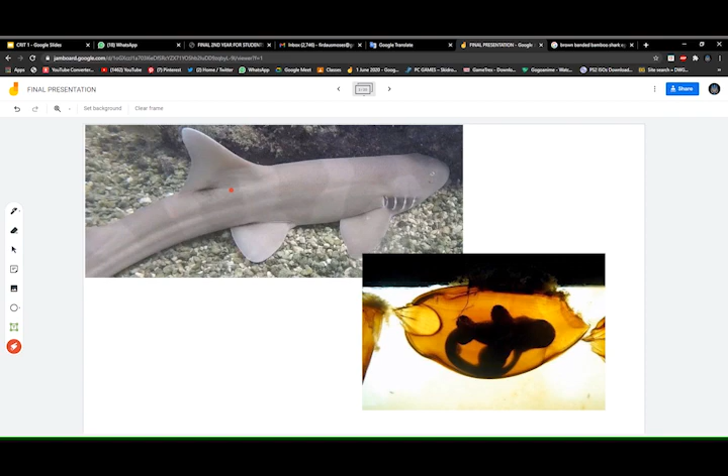Today I'm going to present my rehabilitation center for marine endangered species. The species I've been working on is the brown-banded bamboo shark, a shark species that lays eggs. It is a native shark that lives in Malaysia and is quite endangered here because of shark finning, and also because people love them, capture them and put them in aquariums.

So what is Warisan Samudera? For the introduction, sharks are actually apex predators. They live by maintaining the healthy balance of the marine ecosystem. Without sharks, the ocean will be a disaster and imbalanced. So Warisan Samudera is designed specifically to help continue the legacy of bamboo sharks in the sea, ensuring the marine ecosystem always stays in pristine condition.

Moving on to the site synthesis. For the site sensory, the wind direction comes from the north and northeast side. The view towards the beach is towards the northeast, and this is the sun path.

The first thing I synthesize is to maintain the vegetation, because the vegetation there is quite potential to provide shade to the building. The next one is that the site itself is close to the seawater, so why not use the seawater and channel it to the building for building usage. Also, there has lately been a lot of major flooding in Pahang, so we want to avoid that happening to the building. So I suggested that we elevate the building to avoid the flood from entering it.

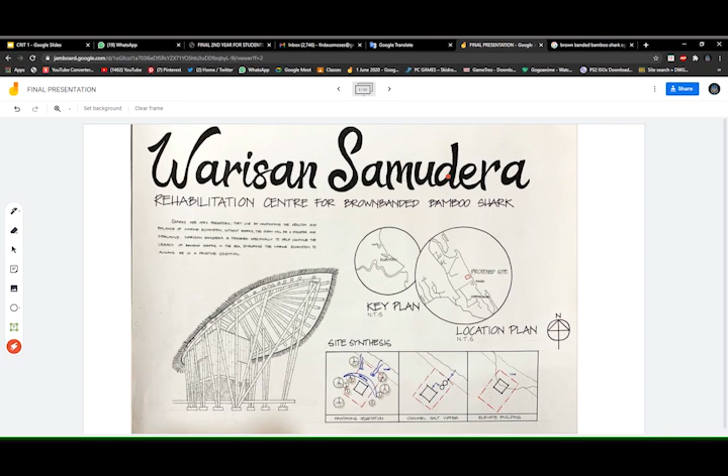Next is the site plan. I'll explain the circulation. The blue one is for public circulation. So they will enter and park here, or they can park there, or they can drop off people there, and then go straight out.

The next one is the green line, which represents the staff circulation. So they need to go here and here. This is the staff parking, and they need to go out once they finish their shift.

And the yellow line represents the technician or services circulation. So this is if you want to go to the dumpster or the cafe to load and unload stocks, the food stocks, or some exhibition stuff. And this is the part where they can load and unload equipment for the labs, the laboratory, and also the hatchery. And then they could go out here.

So moving on to the concept. The concept is inspired by the movement of the bamboo shark in the egg case itself, because for me the egg case symbolizes protection from predators. So what I mean by protection is that it aligns with the objective of the rehabilitation itself, which is to protect the sharks.

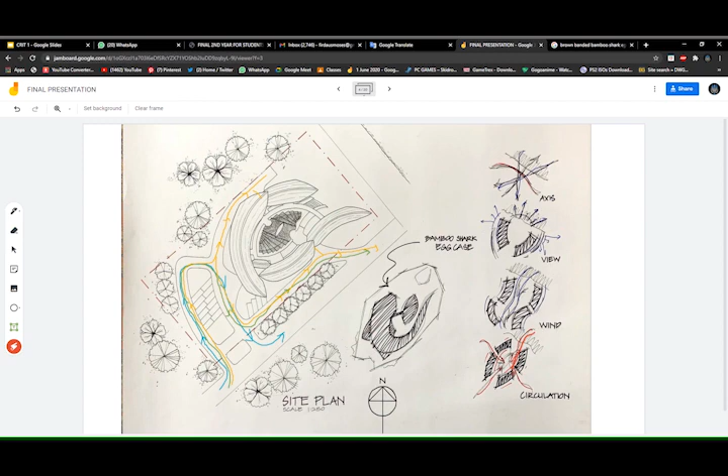Next is the floor plan. This is the waiting area for people before entering the lobby. Once they enter the lobby, they can rest here, or go buy tickets, or if they want to go to the toilet, they can access it from this door and go to the nearest toilets here.

Before proceeding to the briefing room, they need to pass the souvenir shop first. This is a bonus for the staff itself, because it attracts visitors to buy things at the souvenir shop. The next one is the briefing room, which will brief about the sharks, about the bamboo shark, and raise awareness about sharks. This is the technical room for the briefing room.

Moving on to the exhibition, this is the place where they are educated and made aware about the bamboo sharks. Once they finish with the exhibition, they can go straight to the hatchery, or if they want to rest, they can go to the cafeteria for food and drinks. This is the kitchen, this is the storage for the kitchen, and this is the loading and unloading area for the cafe and for the exhibition.

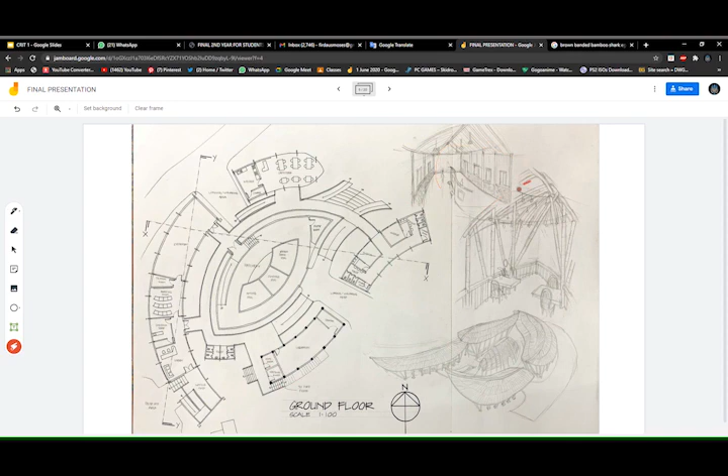This is the storage. Okay, so moving on to the first floor. This is the exhibition, and this is the cafeteria. This is the perspective from the exterior.

So this is the first floor. Once you go up, you can go straight to the storage. This is storage for office or library use. The staff toilet. To the left, we have the library.

The library can also act, besides study, as a meeting room, because the office is not actually that big to make a meeting there. So this is the staff table, the staff room. This is the admin, the office, and this is the pantry for them to have some rest there.

Okay, next, moving on to the design development. The first one is the design itself takes the basic shape of the site shape, which is rectangular, and it is oriented facing towards the view.

The next one is the shape is then divided into half to separate the public and private space. We shifted the public closer to the parking, so that users can access easily into the building, and also the private space is forwarded towards the sea for more privacy.

So next, an opening is created between the spaces, allowing the wind to enter the building. The design starts to take its shape by creating a semi-panoramic view to capture the view. So this is the semi-panoramic view to capture the view.

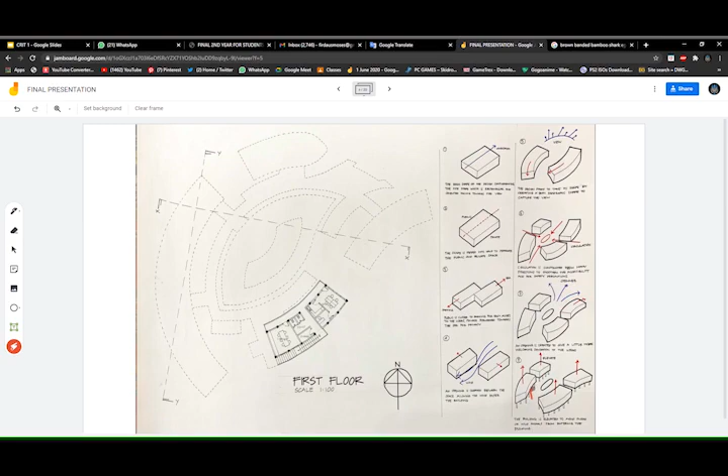And also the last one is the building is elevated to avoid flood or wild animals from entering the building. So this is the elevations: north elevation, east elevation, and south elevation.

So you can see the materials here are mostly bamboo, also construction with bamboo. So the reason I use bamboo is because it relates with my concept, which is movement, the movement of the sharks.

So movement actually relates with flexibility and fluidity. So we want a material that is easy to bend and flexible, but also has strong tensile strength. I studied that bamboo is the best in terms of flexibility and sturdiness.

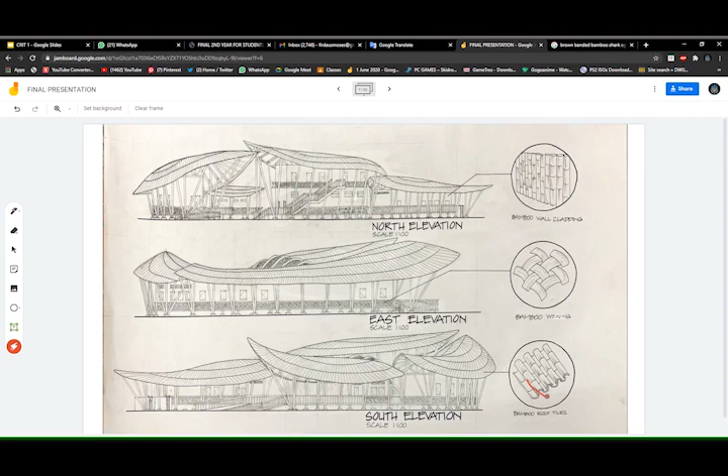So this is the bamboo wall cladding. They apply for the finishes: bamboo wall cladding, bamboo weaving, and also bamboo roof tiles. This is the model that I made. You can see this is the roof tiles, bamboo roof tiles, bamboo wall cladding, and this is the bamboo weaving.

So this is from the north view, east view, south view, and west view. This is the perspective. You can see it is the shape of movement of the sharks here, and this is the egg yolk that is attached to the shark.

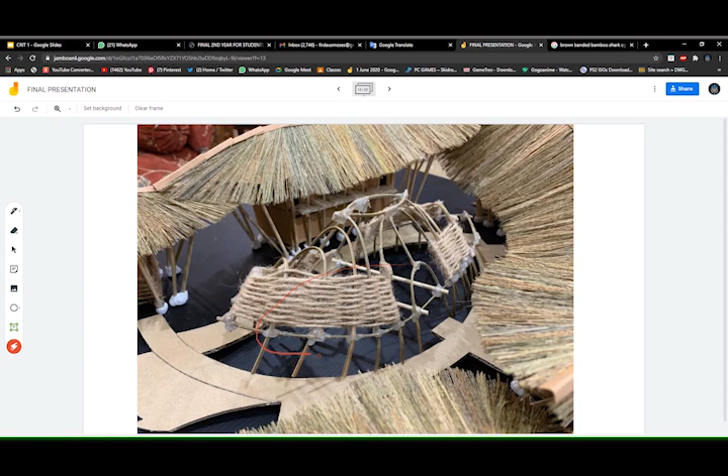This is the perspective. So this is the pavilion for the hatchery area. Next is the west elevation. Next is the section.

So you can see that the space relates to each other. Once you have finished the exhibition, you can go straight to the hatchery area. Or if you want to pray at the musola or go to the toilet, you can go straight to the toilet and musola. Next is the other section.

This is the lobby, the waiting area, the reception. Once you buy the ticket, you will pass through the souvenir shop first, which will attract you to buy souvenirs there.

And you'll go straight to the briefing room to give a briefing about the sharks and awareness about the sharks, and straight to the exhibition to educate users about the importance of sharks and so on. Once they finish, they can either go to the hatchery area or the cafe.

So this is the construction details. You can see the bamboo strip tiles, bamboo strip tiles, bamboo purlins, bamboo rafter, the sheetings, top plate, bamboo stud for the walls, lintels for the windows, bamboo weaving also for the walls for aesthetic value, steel plates, wood floor for the flooring, bamboo beam that supports the floor, and also bamboo column that is attached to the stone foundation.

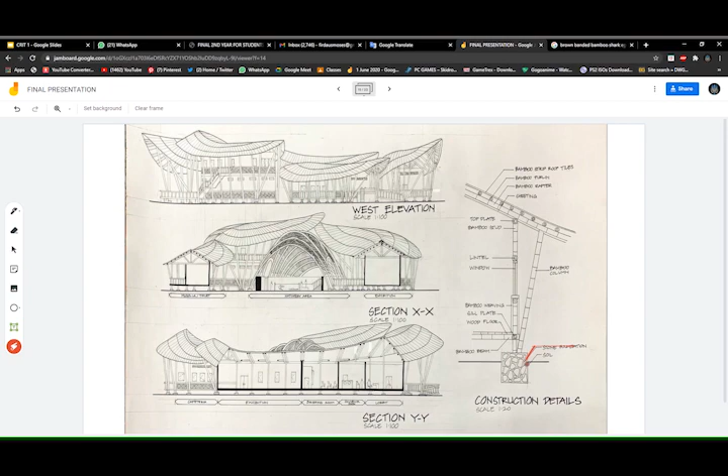So this is the structural model. You can see the details. This is from the waiting area, the lobby, briefing room, exhibition. This is the hatchery, cafe, musola, office, and laboratory.

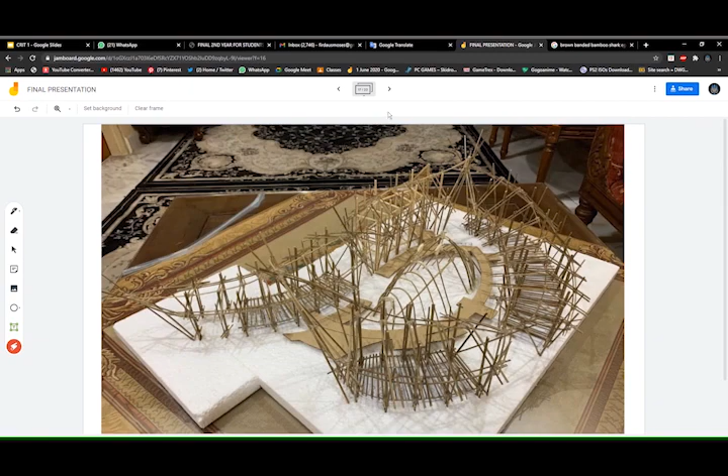This is the hatchery area. This is both of my models. You can see the movement of the sharks there.

Okay, that is all for me. Thank you.